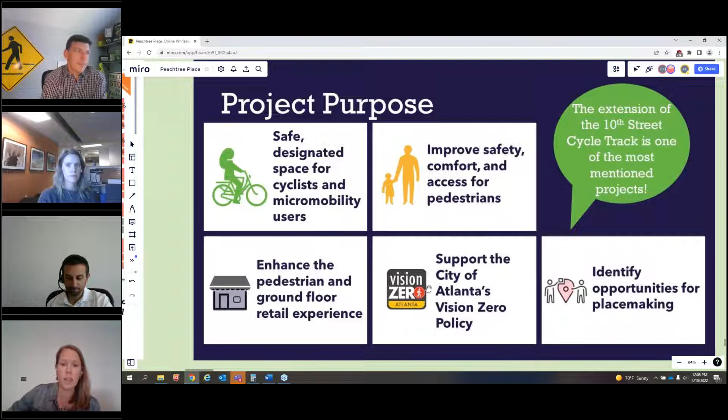Enhance the pedestrian and ground floor retail experience. Identify placemaking opportunities along the corridor. There are some great opportunities that exist today and in the future, and we want to make sure we leverage those to create a really robust experience. And finally, support the city's Vision Zero policy, which is a great way to look at zero crashes in our city and a path forward.

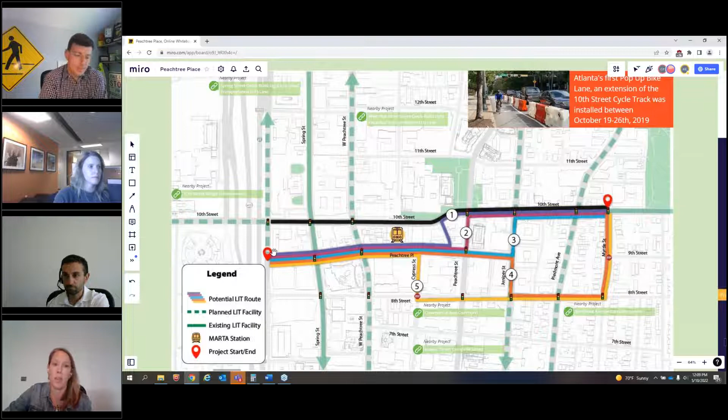This project is one of many Midtown Alliance is working on. We have the Piedmont Avenue Complete Street Project, the Juniper Street Complete Street Project, and Commercial Row, happening at Peachtree Place between Crescent and Peachtree Street. To the west, we have West Peachtree and Spring Street Quick Build, and the 10th Street Bridge Enhancement Project, which will pick up right where William and Peachtree Place meet. Again, this takes us from the Myrtle 10th Street cycle track all the way over to William and Peachtree Place.

Where we are in this process: we started off last year reaching out to some key stakeholders along the corridor. We also did a walking audit with the team to identify opportunities and brainstorm potential solutions. From that walking audit, we moved forward with a multimodal analysis report, more of which you can find on the website. That gave us direction on what was really feasible within the corridor, and we'll be walking through that momentarily. Since that time, we've started laying out what the conceptual design could be, and this is still moving forward to refinement. So here we are today.

We are in round 2 of stakeholder interviews and the virtual open house. Moving forward from this process, we'll refine the conceptual design and move into schematic design, and then to the approved concept presentation. Funding and implementation has not yet been approved. It's part of the TSPLOST 2.0, so get out and vote later this month. That will be on the ballot for TSPLOST.

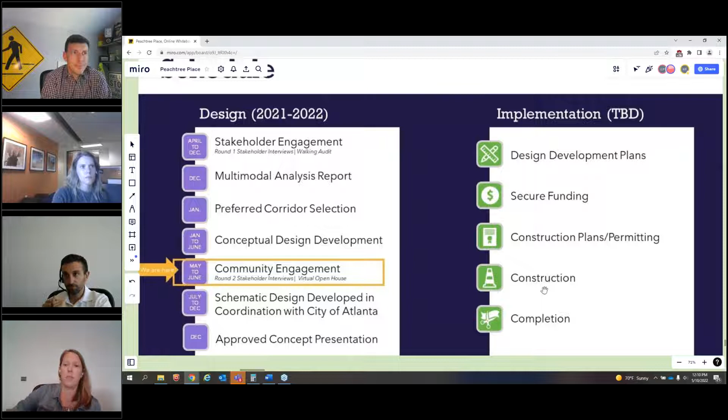And with that, I'm going to turn it over to Jeff, who is going to walk through the numerous alternatives that we reviewed as part of our multimodal analysis. Jeff, I'll turn it over to you. Thanks, Addie.

Yeah, so as Addie said, we had a lot of alternatives and a lot of scenarios that we walked through as part of laying out these bike lanes. This outlines our screening process. There was a slide earlier with 5 potential routes that go through a lot of intersections and have a lot of different ways that a bike lane could move through those spaces.

So we have this process where we started out with that list of feasible routes. We screened them and assessed them for measures of safety, connectivity, comfort, and directness. We took some of the routes that came out of that screening and put together sketch plans to inform additional analysis, where we looked at things like reassessing safety and evaluating traffic movements and multimodal wait times. From that point, we moved into our recommendations. But I'm going to step through each of these steps to give a better overview.

As the alternative screening began, we took a look at industry guidelines that pointed us to some top measures for effective networks: safety, comfort, and connectivity. Along with directness, we used these measures to screen those routes. For the safety measure, important to Midtown and to the Vision Zero goals of the city, we decided to take a look at the number and severity of conflicts between vehicles and bikes that could potentially happen along those routes. That was important, especially when we looked into the crash histories and saw that 46% of bike crashes around this area resulted in some sort of injury for the cyclist.

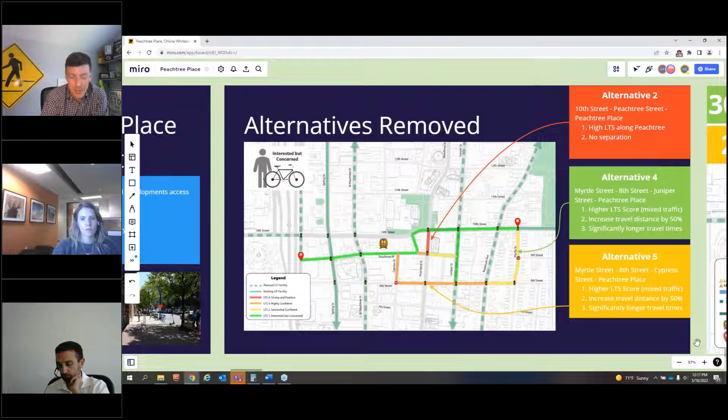So, well, we can go to the next slide.

The routes that did emerge out of that, which we call alternative 1 and 3, were carried into the sketch plan phase. These routes both use 10th Street and Peachtree Place, the difference being whether they transition at Crescent Avenue, as in alternative 1, or Juniper Street, as in alternative 3.

The main question between these two routes at this point was how the bicycle lane was going to be positioned along 10th Street, the various lane configurations and patterns that could accommodate travel at the intersections and at those transition points, and several methods of signalized crossings, especially along 10th Street.

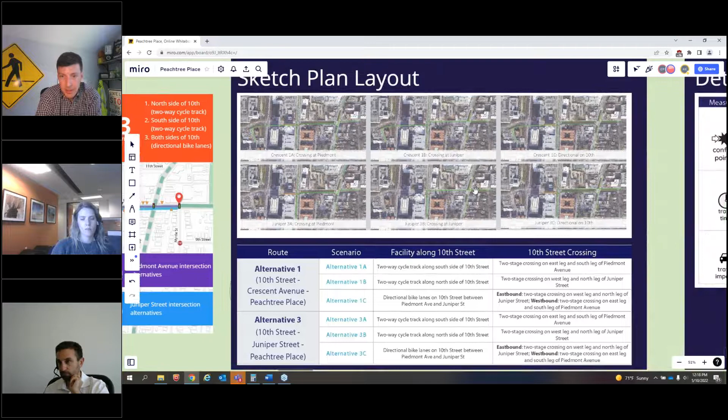This screening produced 6 main scenarios for detailed evaluation. The main differences between these 6 is which side of 10th Street is going to be utilized, and how that transition would work, especially at the Juniper and Piedmont intersections.

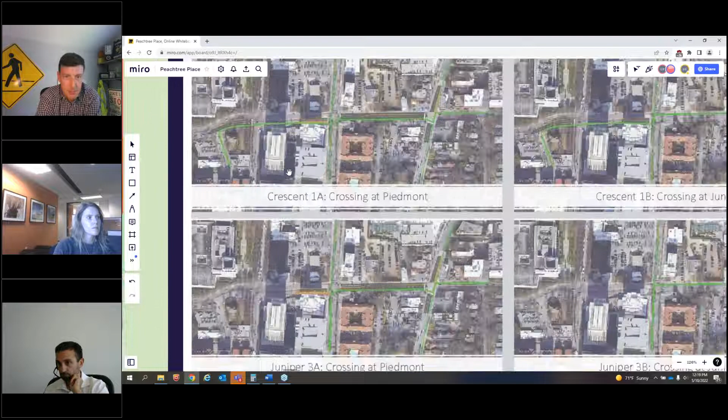On the left-hand side, we've got alternative 1A and 3A. Alternative 1 being the route that uses Crescent, and alternative 3 being the route that uses Juniper. Both of these would cross at the Piedmont intersection first onto the south side of 10th Street and then continue west.

1B and 3B would continue the cycle track as a 2-way facility along the north side of 10th and then cross it at Juniper.

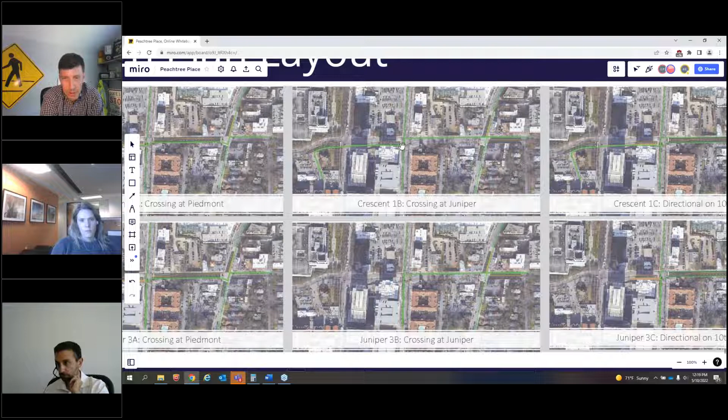And we had a third option of 1C and 3C, which had a bicycle lane on both sides of 10th Street, the north side and the south side, and offered crossing opportunities at both the Juniper and Piedmont intersections.

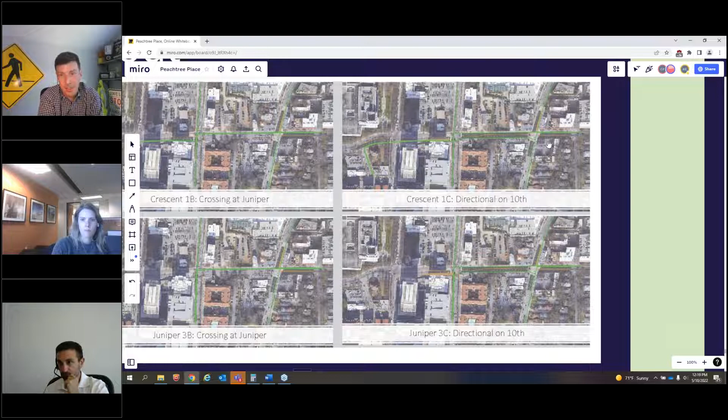And here's where we moved into the detailed analysis. Each of the scenarios was reassessed for the type and severity of conflict point, and assessed for pedestrian and cyclist wait times at intersections and changes to vehicle operations.

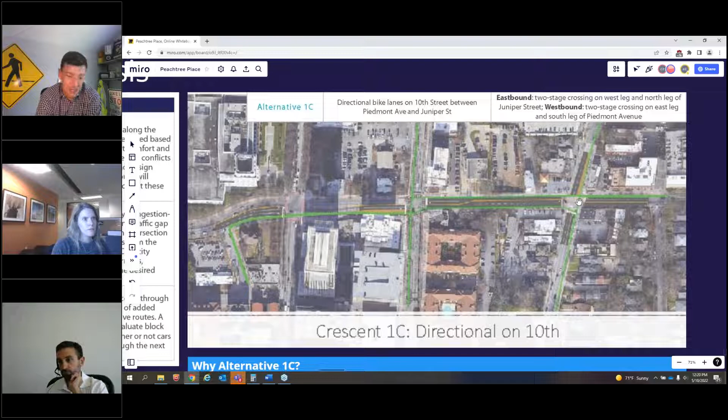The scenario that did result in being recommended as the best between those six was Alternative 1C. It includes directional lanes on 10th Street, had the lowest severity of driveway conflicts, and with those lanes being directional on either side of 10th Street, relied a lot less on drivers looking for cyclists approaching from their right-hand side.

It also provided the ability to add some safety through a bike-only crossing at the Piedmont intersection, which is a slight variation between this iteration and what you'll see in the concept plans. It was also shown to keep vehicle stacking within the current distances between Juniper and Piedmont better than some of the other alternatives. Utilizing Crescent as 1C, as opposed to 3C, did help us avoid some private property conflicts that the Juniper route couldn't avoid.

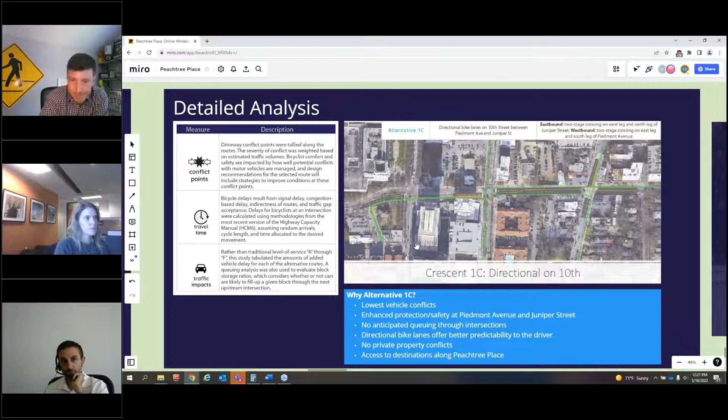I think I can certainly go into questions as far as more of the analysis, but I'm going to turn it over to Chris now to go over the concept.

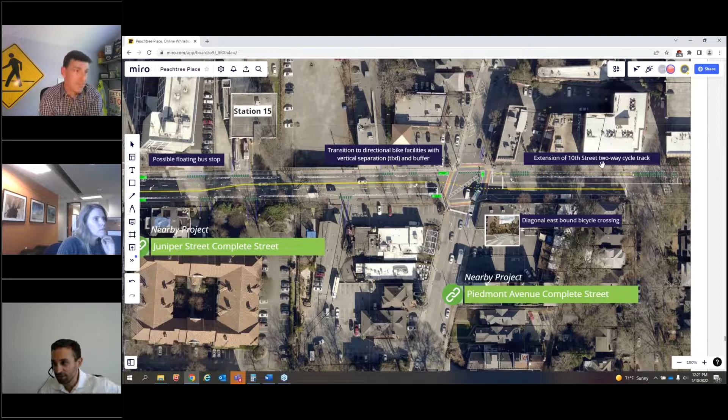So I'm going to walk through the concept starting at 10th and Myrtle, where the existing two-way cycle track ends. We plan to continue the two-way cycle track to Piedmont Avenue.

Just want to point out that we're currently just showing a generic buffer treatment as white striping. However, we have yet to select a buffer type and material because that will be defined as we complete the concept, based on funding and geometric constraints. So that's what that is when you see that.

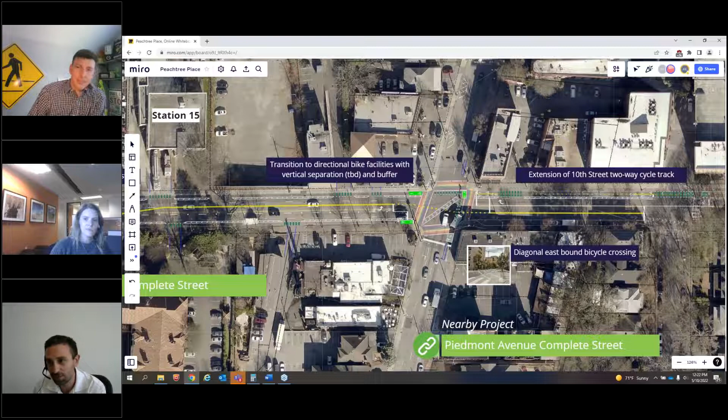As we migrate over to Piedmont Avenue, this is where we intersect the Piedmont Avenue planned bicycle lane and complete street project.

One of the things that we did here was we transitioned from a two-way cycle track on the east side to directional bike lanes on the west side. And we use a diagonal crossing to get the eastbound cyclists over, so there will be a dedicated bicycle scramble phase that will permit that diagonal crossing.

We also wanted to create an intuitive connection from Piedmont Avenue bicycle lanes to the 10th Street bicycle lanes as well, and we do that by tying into the existing intersection crossings there with the bike lane.

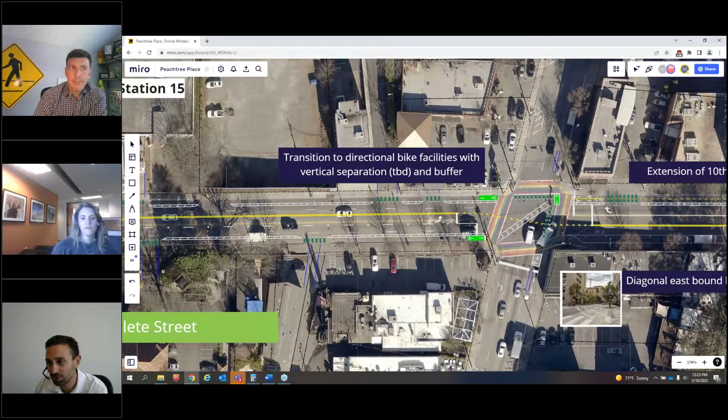As we progress over, we have directional bike lanes on the block between Piedmont and Juniper Street. You'll notice there are alternating left turn bays for the eastbound left at Piedmont and the westbound left at Juniper.

That was a result of the traffic study and also some lessons learned from the demonstration project. So we wanted to provide turn storage at both of those intersections to help alleviate some of the queuing that was a result from that project.

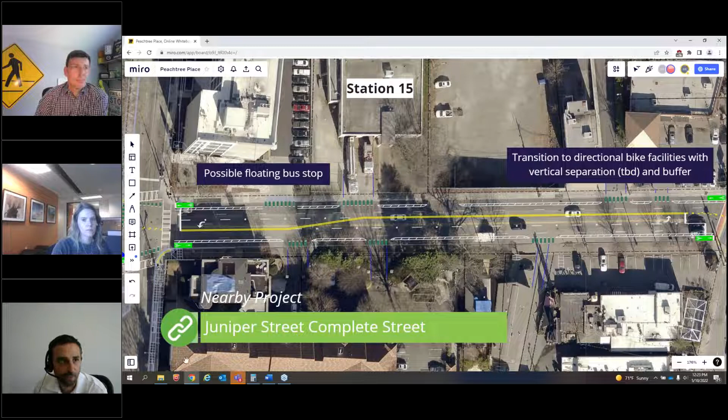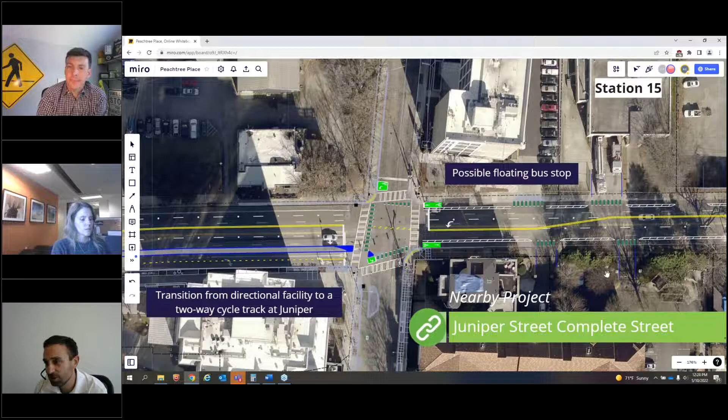We also need to accommodate the fire trucks leaving the fire station, so we will be looking at the turning movements of fire trucks coming in and out and making sure that the facility doesn't impact emergency operations.

We'll also be looking into a floating bus stop near the residential building at the corner of 10th and Juniper to accommodate their accessibility needs as well.

As we tie into the Juniper Street intersection, there will be the Juniper Streetscape project, which will include a southbound bike lane on the west side.

That project also has some new signal phasing, so there will be protected bicycle crossings going southbound as well as going eastbound. There'll be a protected right turn signal phase and a southbound right turn signal phase that will help time separate the bicycle movements with those turning movements.

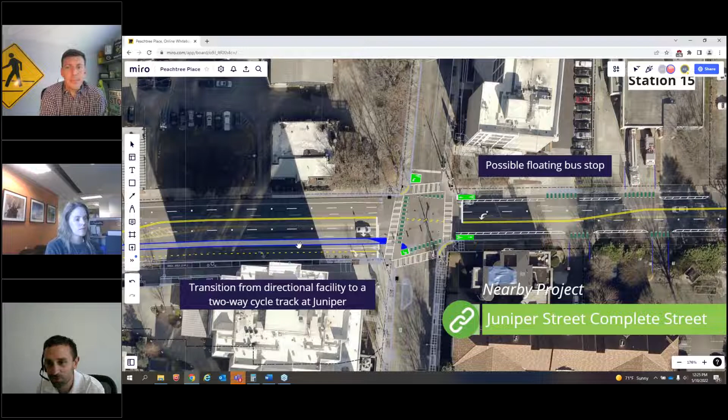We also transitioned back to a two-way cycle track, this time on the south side, as we position the bicycle lanes to get access to Peachtree Place. There is a nice, robust buffer between the two-way cycle track and this section of 10th Street, which carries a little bit heavier volume than to the east.

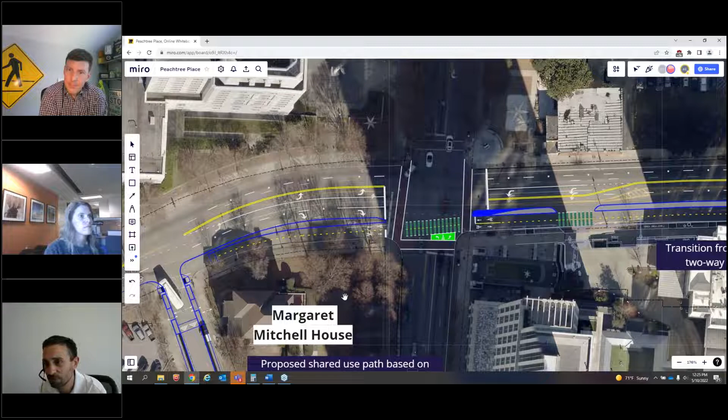As we progress over to the Peachtree Street intersection, we are proposing new signal phasing here as well. There will be time-separated eastbound right and westbound left movements with the bicycle movements, so there will be some safety added there.

There is also a turn box provided just to the south of the crossing that will allow cyclists to continue north on Peachtree Street, or if they would like to continue west onto 10th Street and go directly down 10th Street, that box is provided there as well.

As we continue west, we now ramp up onto the sidewalk as we prepare to turn south on Crescent. What's shown here is a proposed condition as part of the Stratus development.

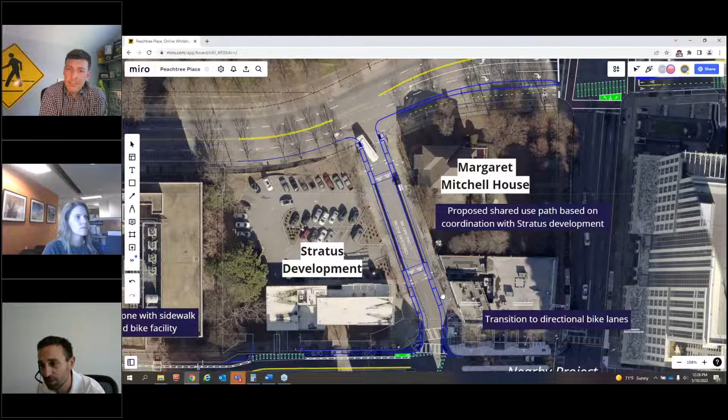There will be one-way southbound on Crescent Street with also this very wide and long raised table crossing mid-block that will create a pedestrian space, and then we will have a shared use path along the eastern side of Crescent Street to go down.

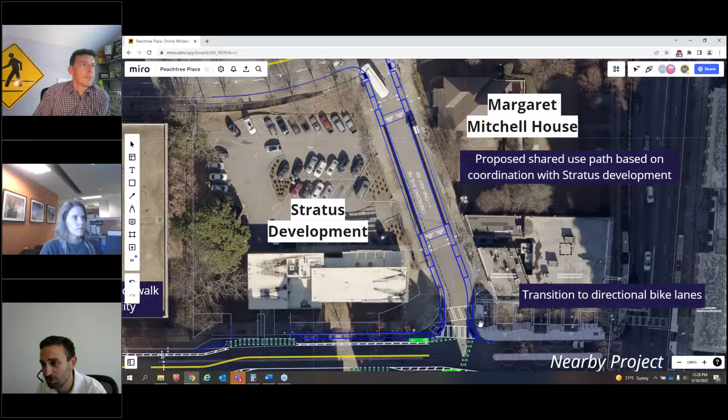There'll be a 12 to 14 foot wide shared use path/sidewalk to get cyclists down to Peachtree Place, where they will then enter directional bike lanes on either side of Peachtree Place at the intersection with Crescent.

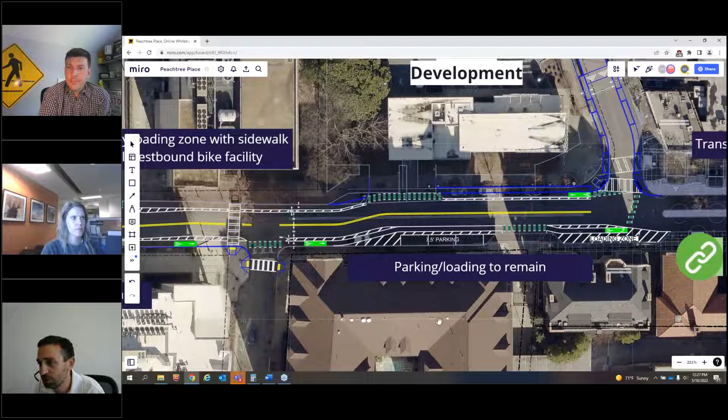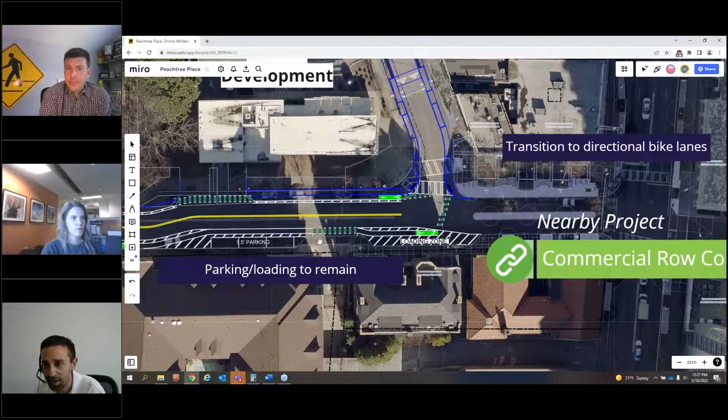This design minimizes impacts to the newly constructed commercial row project. There's also a newly upgraded driveway apron just to the west there that provides ADA compliance for the sidewalk going across that apron, which will be preserved in this design.

And that apron actually does lead us to this design choice of having the parking on the inside of the bike lane, just so that we can provide that, keep that ADA compliance across that driveway.

We've also introduced a chicane as we continue west to help calm traffic. Currently, Peachtree Place is a very long and straight street with nothing to really slow vehicles down, so we wanted to introduce some curves here in order to calm traffic.

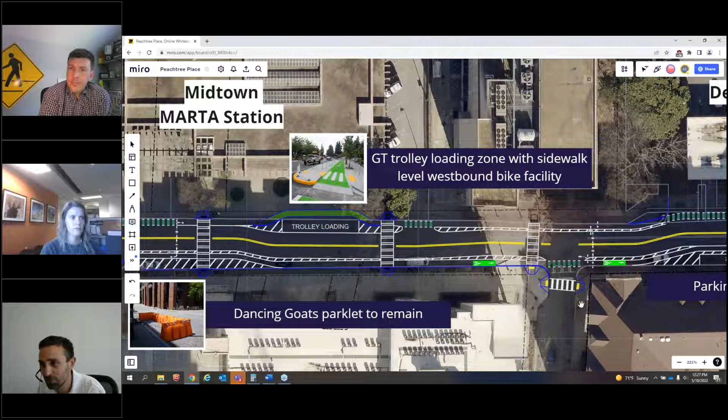As we continue west, we now enter near the Midtown MARTA station. As you can see, we've added 3 new crosswalks as part of this project, one at Cypress Street, and then 2 at the MARTA station on either end of the facility to accommodate existing pedestrian crossings that occur today.

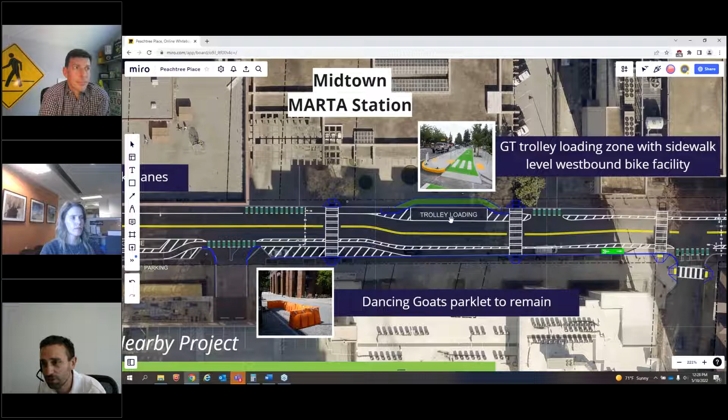There's also space for the Georgia Tech trolley that can pull off to the side and dwell there, and we ramp the bicycle lane around it up onto the sidewalk. There's an example above showing what a floating bus stop may look like.

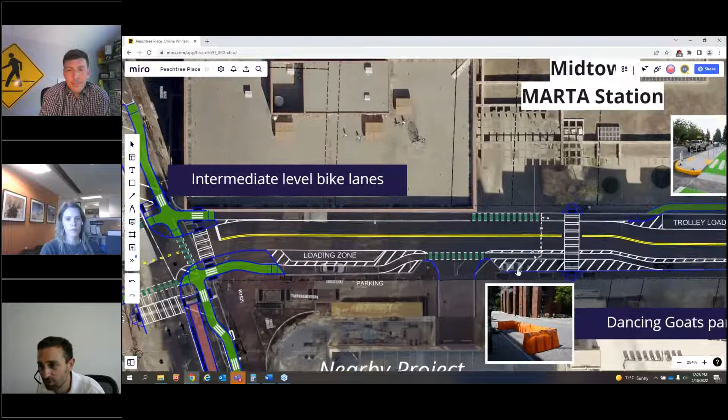We've introduced another chicane on the other side of the Marta station, again to calm traffic. We've preserved space for the parklet that's currently being used by Dancing Goats, so that space will be preserved.

We've also maintained some loading zone for future retail needs. That could be a parklet, it could be valet, it could be parking, loading, but that is there for future retail needs as well.

As we continue to the intersection with West Peachtree Street, we've paid a lot of attention to this intersection. It's currently skewed, so we wanted to better align the eastbound and westbound approaches. This will help direct traffic to where they need to be and also make pedestrians and cyclists a little bit more visible as vehicles now need to make 90-degree turns at this intersection.

We've also expanded, or are proposing to expand, some of the sidewalk space, especially on the tight corners on the northeast and northwest side, and create some expanded bump-outs where there is unused space as part of the overlapping design of this project and the West Peachtree Street Complete Street project.

The green shaded area you see are actually intermediate level bike lanes. This was done for a number of reasons. One, it was to clearly delineate where cyclists ought to be.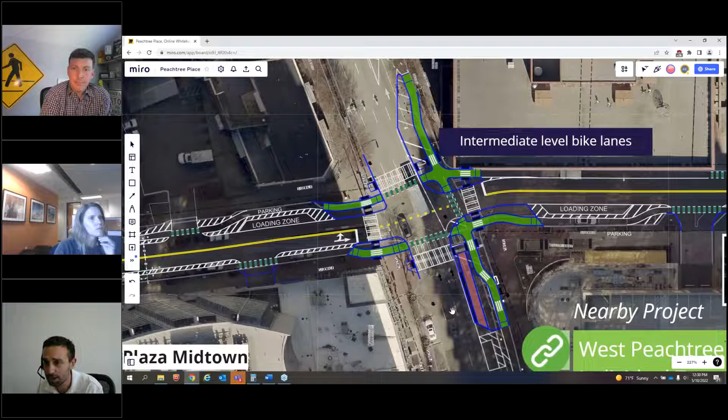It also helps because it has a detectable edge so that blind pedestrians know that there is a difference in use as they start to walk between the sidewalk and the intermediate level bike lanes, and it will guide them to appropriate crossing locations.

It also requires less right-of-way to construct ramps, loading zones, and landing areas with this treatment, as there are incremental declines in elevation as you go across the bike lane and then down to the street. So it does require a little less right-of-way than if we were to have fully depressed bicycle lanes through here.

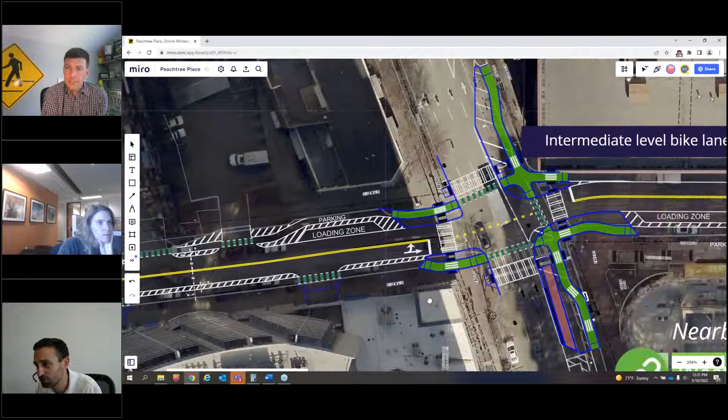We've also, if you scroll back, provided a floating bus stop for the current commuter bus just south of the intersection. That's delineated in that red color, so there'll be room for any sort of bus stop amenities or space for buses to pull off if they need to.

As we continue west, we maintain 2 loading zones on this block, one on the west side and one on the east side. The one on the east side is mainly for retail deliveries. That was stressed as important to their business function, so that was maintained.

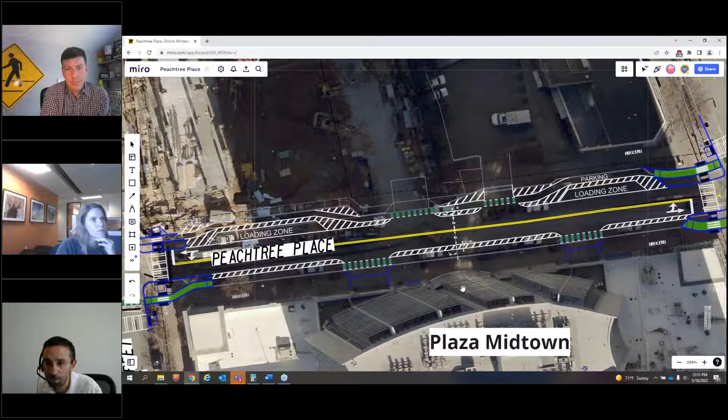And then the one on the west side is for rideshare for the student tower that is on that side of the building. Those are outside the bicycle lane with a nice buffer zone for doors opening as well.

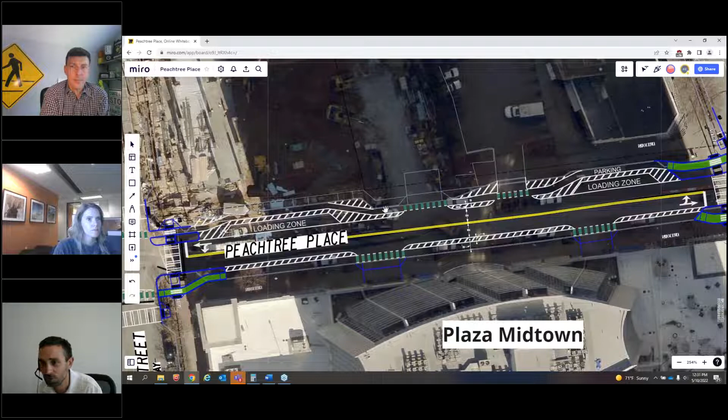This design does require the removal of parking and some of the bump-outs along the south side of the street. However, there is free parking in the plaza garage to accommodate those needs.

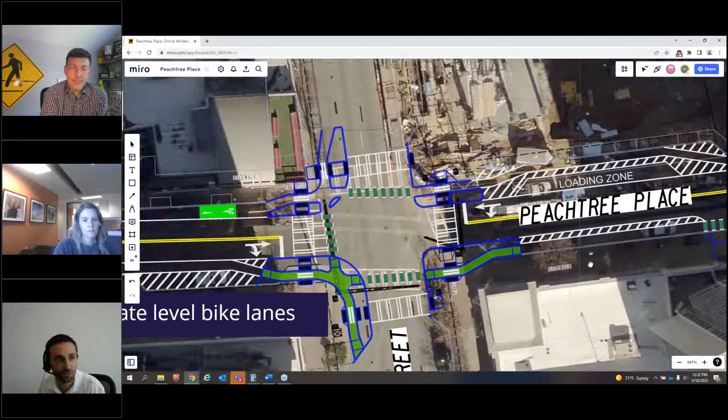As we continue across the intersection with Spring Street, there is a future signal planned for this intersection, which will help make this crossing safer. This intersection also has a protected intersection design. We're using intermediate level bike lanes on the south side only, where we've had some right-of-way constraints, and then fully depressed bicycle lanes on the north side where we weren't as constrained.

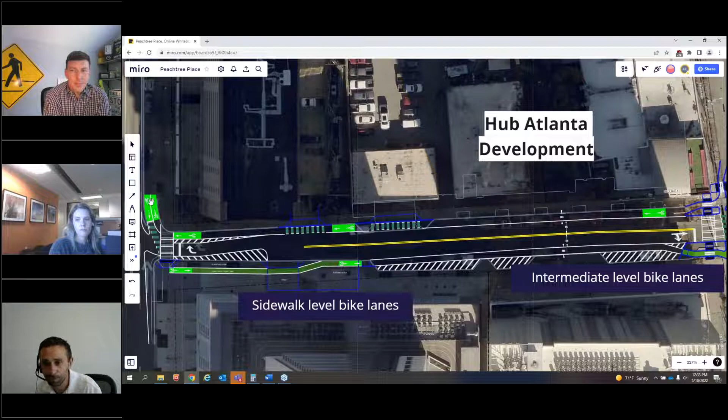As we continue west, this block of Peachtree Place is planned to be converted to two-way as part of another project, so that is shown here. It is just two-way up until the Modera garage entrance in the back, and then it's still one-way outbound onto Williams Street. We connect to the 10th Street Bridge project here at Williams Street.

The eastbound bike lane actually ramps up onto the sidewalk level and then comes back down. This was a way to avoid a lot of utilities, including fire hydrants and water vaults along the south side of this block. We've also provided space, as shown in the hashed out areas to the east, for future parklets or bicycle parking corrals, or things of that nature, so that could be dedicated space for the community.

And I think that's it for the walkthrough of this concept.

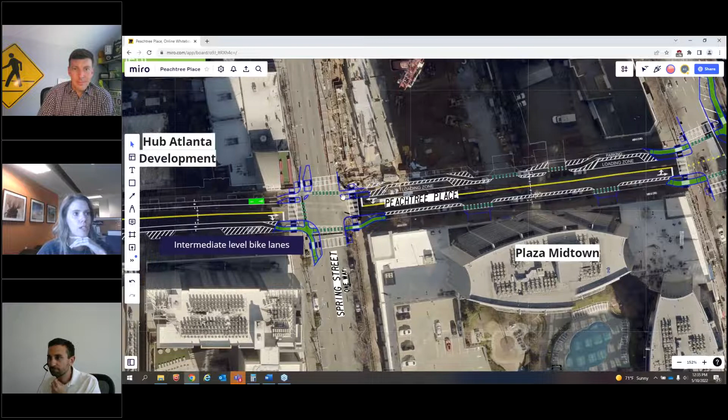It's called the Last Mile Project. So if you go to midtownatl.com/projects, it lists all of those things we're working on. You can stay up to date on the process there, but it's definitely one that we know is really, really needed and desired. I walk across that intersection daily, and we know it's not fun. So hopefully soon.

Let's see. We have had some questions about the barrier protection, both material and the need to stop cars from parking in the bike lane like they do. So wherever we can along this corridor, we're going to provide the highest level of protection that we can. What that exactly looks like at this point, it's too early to say. So yeah, I mean, we're going to do what we can.

The other piece that we have really tried to bake into this plan is understanding that there's a lot of competing needs for the curb. And so trying to accommodate the need for temporary loading wherever possible for residences and businesses along this corridor, we think will offset some of that behavior.

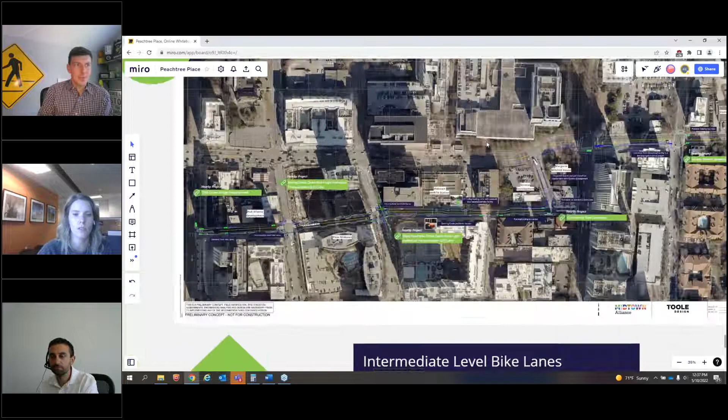We've got a question, Chris or Jeff, about bike signals at the intersections along the route. We've had one about where those signals will exist, and another about how to reduce right turn conflicts, so where there will be permissive right turns versus no turns on red.

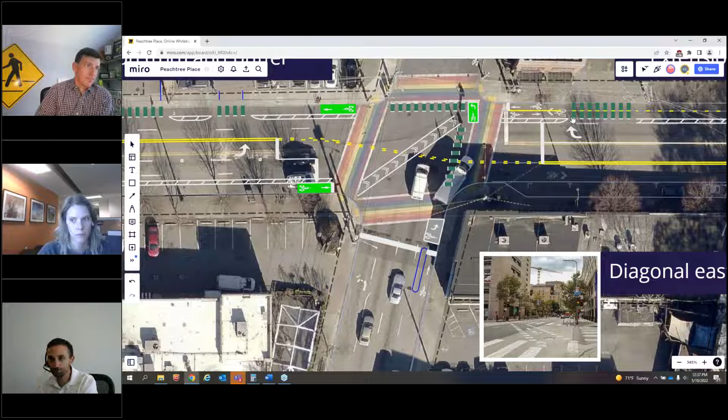Yeah, so we're proposing, I'll start at Piedmont, going in the order that I walked through the concept. At Piedmont, there will be a bicycle signal for a diagonal crossing. However, the northbound cyclists and westbound cyclists will run concurrently with vehicles. However, there will be some no turns on red to help mitigate the conflicts with right turning vehicles and cyclists staging to turn. The turning volumes here were low enough that recommended thresholds weren't really met for complete phase separation of those movements.

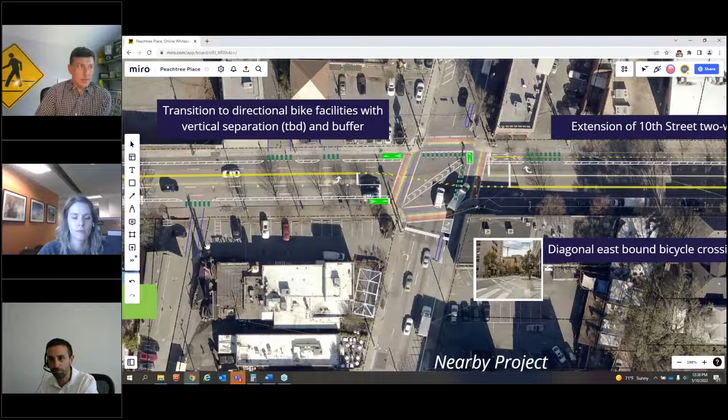Going over to Juniper, there were significantly more turning conflicts, and so the proposal there is to have time-separated bicycle movements and conflicting right and left turn movements. Part of that is part of the Juniper Street project, and then part of that will be part of our project.

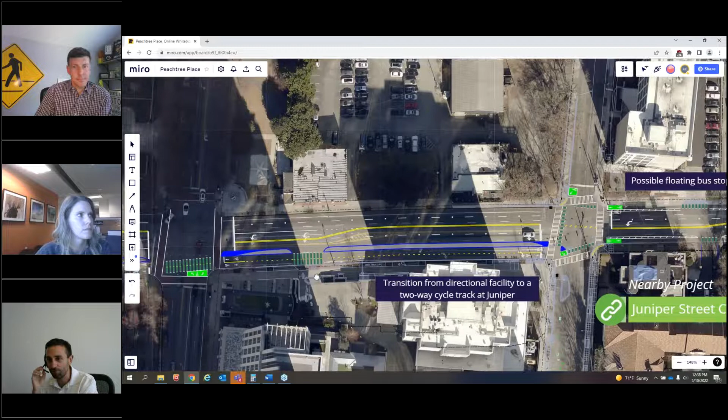So those movements will be protected. And then at Peachtree Street, we plan on having a dedicated bicycle phase that will be separate from the conflicting eastbound right and westbound left turn phases.

And then at Spring Street and West Peachtree Street, we're not proposing signal modifications there. We went with a protected intersection design. The volumes here are significantly lower than along 10th Street, so we're doing a lighter touch in terms of traffic signals and instead just opting for a more visible approach as cyclists and pedestrians cross this intersection, making them a little bit safer with design.

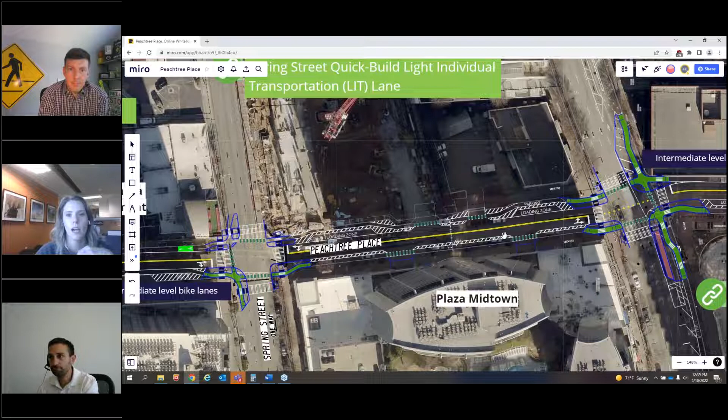Thanks, Chris. While I've got you unmuted, we have a question about the look of the map, just to clarify what the blue lines along here mean versus the green. Could we do a rundown of that?

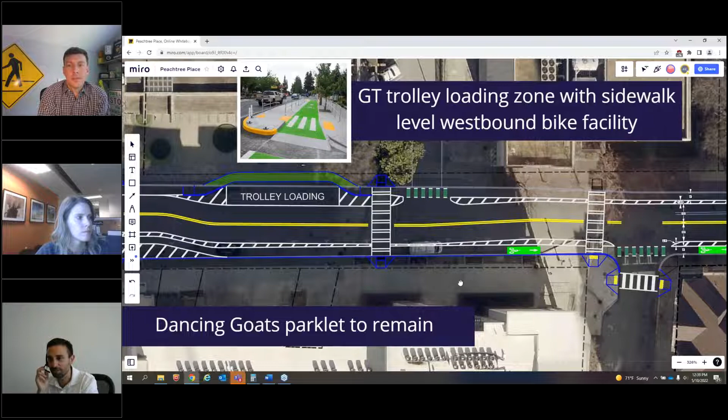Yeah, so the blue lines are just the curb lines. Some of it is new, some of it is existing. It's just a way to show what the final curb alignment will look like. Most of it, like I said, is the existing curb. The green are pavement markings, as are the white lines.

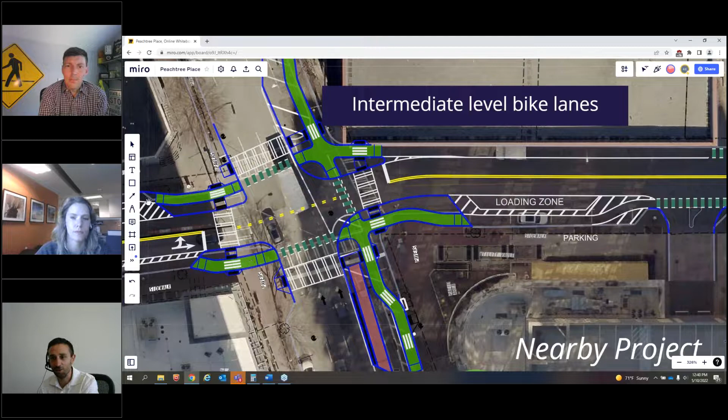The greens shown here are conflict markings across driveways and intersections. The green in the lane is more for bicycle pavement markings, to make them a little more visible. And then the ones at the intermediate level bike lane, that was just a way to show on the plans where those will be. They may not necessarily be painted green during construction, it was just a way to communicate where those are. And the same with the red to the south, that's just to communicate that that's going to be a transit area, and what that looks like hasn't been designed yet.

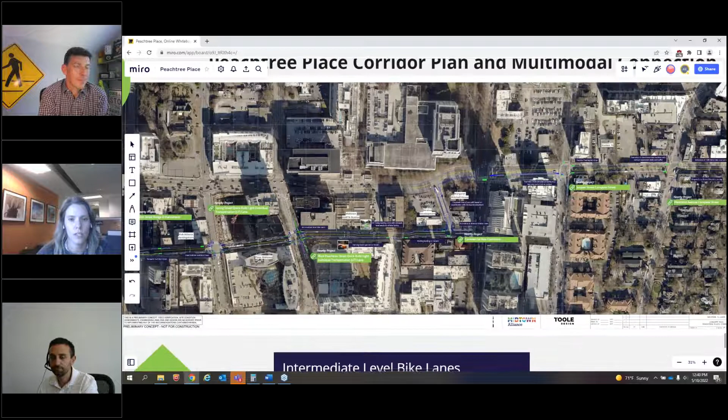Awesome, thank you. So we've gotten several questions about protection along the route. Just again, want to reiterate that we're early in the design phase, so we haven't selected the exact materials that we're going to use. There won't be a single material used throughout the corridor, so it'll be case specific likely.

And as we make those decisions, we will have other meetings that present those more detailed decisions. Along Peachtree Place specifically, this is a constrained area, a lot of residential and commercial needs. It has the advantage of being a fairly low volume street. So where we can, we've created pickup and drop off zones.

But we are in a constrained space. So again, where we can provide protection, we will. And in some cases, we might be limited in what we can do. So we just have to advance the plan and see exactly what we're able to squeeze in and what makes sense.

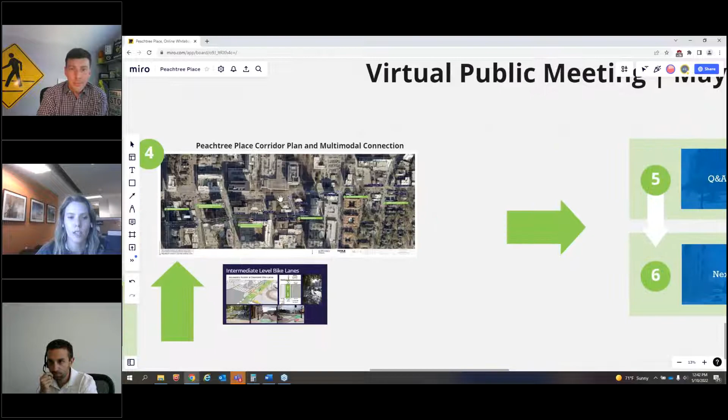We've gotten a couple of questions as well about the Stratus project, which is 80 Peachtree Place. It's a large project that abuts Peachtree Place, 10th Street, and Crescent. The proposed main entrance for this development's parking deck is on 10th Street. There will be a loading dock on Peachtree Place.

So while we do anticipate a slight change in traffic volumes, not so much that it's going to be catastrophic to the area, according to the projections that we've seen. This is still a proposed development, so there's nothing guaranteed at this point.

We're coordinating with those developers in terms of how the proposed streetscape along Crescent progresses, and the courtyard they have proposed for the Margaret Mitchell House. All those details are being taken into consideration, but from our team's perspective, understanding that we live in a city that is developing, that there's a lot of density coming, it just highlights the need to provide these dedicated and more protected spaces for people so that they can travel safely throughout the district and really enjoy the streets and all they have to offer.

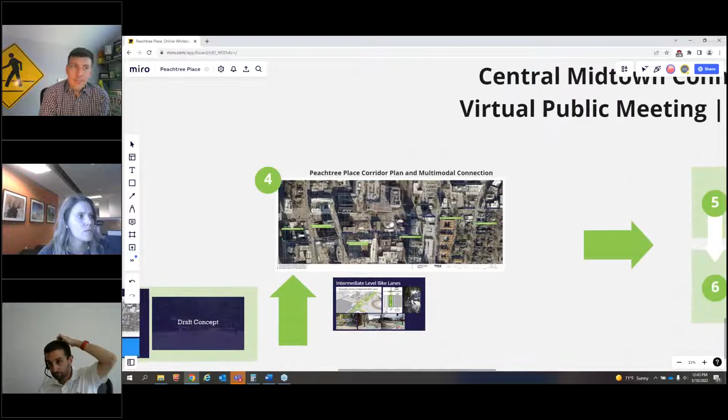So we have a question about the alternatives on 10th Street, and people who prefer to remain on 10th instead of taking the detour on Peachtree Place.

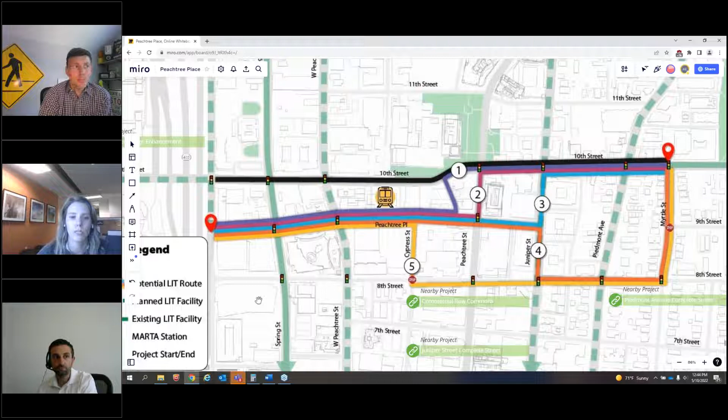Certainly, just as today, if you are a fearless and confident rider and want to proceed on 10th Street, that's going to be an option for you moving forward. We don't anticipate any changes to 10th Street as a result of this project, but routing along Peachtree Place gave us the opportunity to route people towards more destinations, retail, residential, MARTA, and really presented a lot of opportunities for placemaking, taking advantage of those lower vehicular volumes. In the grand scheme of things, what you get out of this route in terms of access to different amenities, the trade-off is a really small travel time delay. So it made sense.

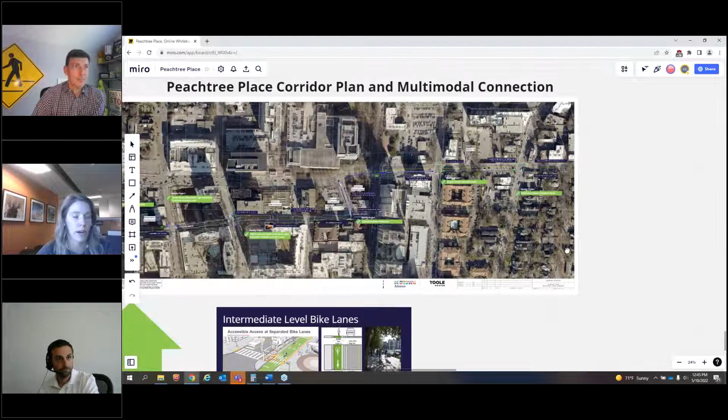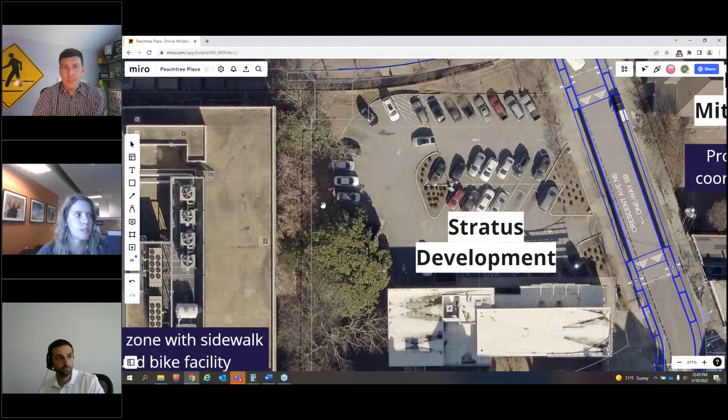Where will the driveway for Stratus be located? This is again a separate private development, not associated with this project, but they will have two curb cuts, one on 10th Street, which is a variance that they sought so the curb cut would be moved off of Crescent, which we think was an advantage, and one on Peachtree Place. They're still going through the design process, so the final plans remain to be seen.

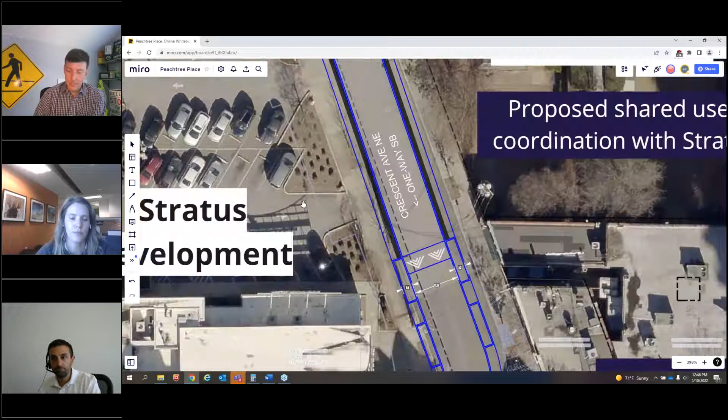I don't know how much we got into this, but as part of the Stratus development, Crescent will be turned into a one-way southbound street. It will be heavily oriented towards pedestrians, with a shared-use path potentially for bikes and pedestrians to travel safely down that stretch of path.

So we had a question about people turning right on Crescent onto Peachtree Place to access Williams Street and 75. Maybe, but that doesn't seem like the most direct or preferable route. So yes, people can use the streets to get to different places, but I don't think that would be the preferred way to get on 75 and 85.

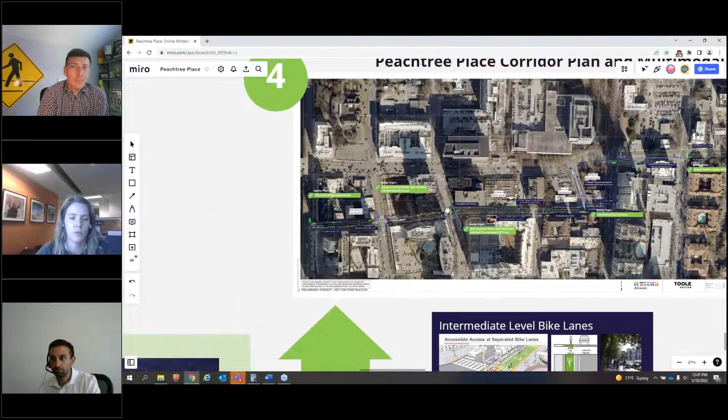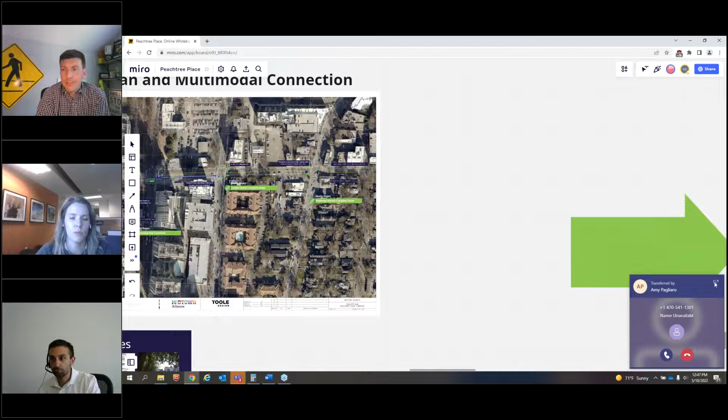Chris or Jeff, can you speak to the bike delay that this routing suggested in our analysis? Yes, I can speak to that. The travel time we looked at for route alternative 1 was going to be around 7 minutes from start to end.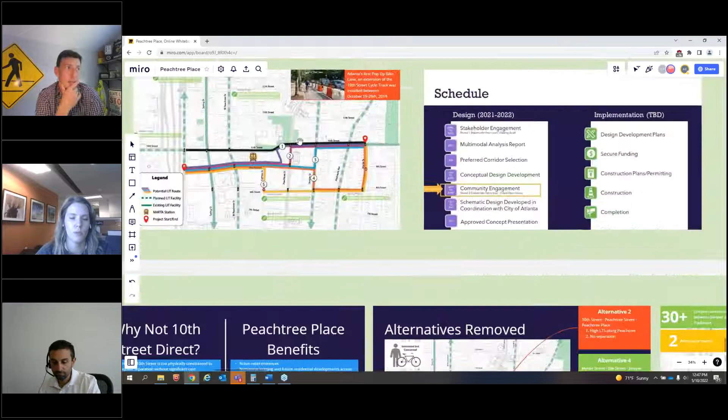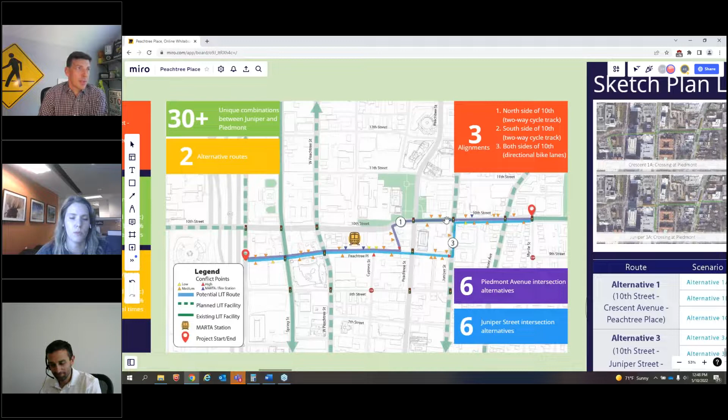That was a difference between the Myrtle and 8th route, which are going to be more like 9 or 9.5 minutes. When we took a look into the detailed analysis at the intersections of Juniper, Peachtree, and Piedmont especially, where we've got those dedicated bike phases and movements, we saw about a minute to a minute and a half of wait time across the total of 10th Street on average. That will depend on when the cyclist arrives. It could be less.

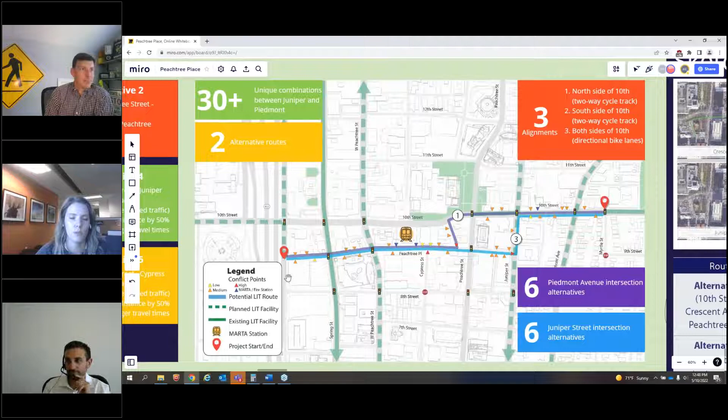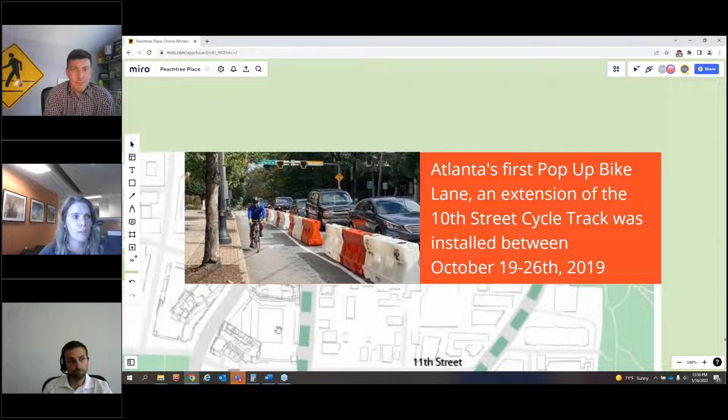So we have a question about what was learned from the pop-up bike lane on 10th Street that we did, I believe it was 2018 or 2019. That was a really fun project. For those of you who remember, we did one of the city's first tactical urbanism projects and popped up a bike lane from the end of the cycle track to Peachtree Street. We learned a lot from that project, but one of the key things we learned was that a bike lane along 10th Street in this section was demonstrably feasible, and that the biggest thing we needed to focus on was signal optimization, which could really offset the additional travel time incurred by people driving cars. So it was very valuable lessons learned from that project that will be utilized in the implementation of this one.

Another question about bike detection at these intersections, and I think that's separate from the signalization at the intersection. So Jeff or Chris, can you speak to bike detection?

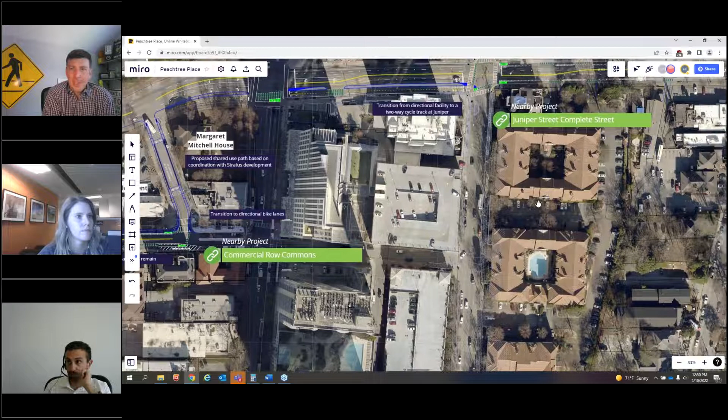Yeah, so that will be selected in coordination with ATL DOT to make sure we're using products they're currently using elsewhere in the city and that they're happy with. It will most likely be passive detection in the form of video or something similar, so that cyclists aren't required to push a button to activate it.

Have a question about timeline. So timelines are always kind of hard to nail down. We're hoping to get to 30% design on this project in the next several weeks to a month or two, so we'll be coming back to the public when that's finished, and then we'll move on to 60-90% plans, which will probably be 6 months to a year. This project is on the TSPLOST list, so once we have funding identified, we'll be able to move forward with more concrete timing. So if you have the opportunity to get out and vote on TSPLOST, please do.

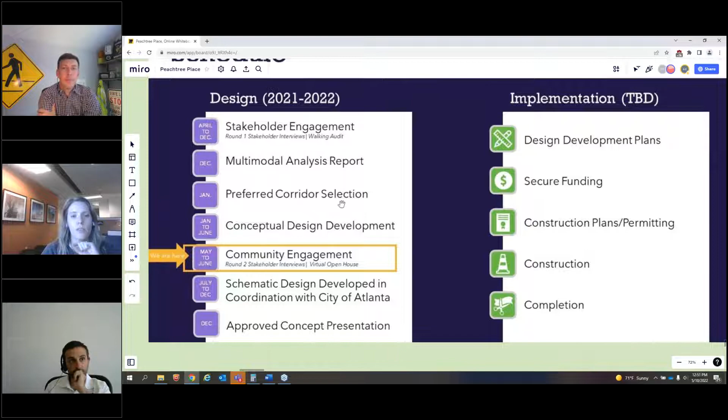We've had several questions about the details of the traffic analysis. There is both the full traffic analysis and an executive summary, a high-level digestible option, that you can find at midtownatl.com/projects/central-midtown-connection-plan. That's really where you can access all the information associated with this project. At the end of this presentation, you'll get a link to the recorded version, and the Q&A will be posted there as well, along with the multimodal traffic study. There will also be a map exercise where you can review and comment on specific things throughout the corridor, and future design iterations will be posted there too. So keep an eye on that page, it's really a wealth of information.

We've had several more questions about protection along Peachtree Place. Again, to reiterate, we're going to provide protection where we can. The details of that protection haven't been decided yet at this point, but where we can fit it, we will.

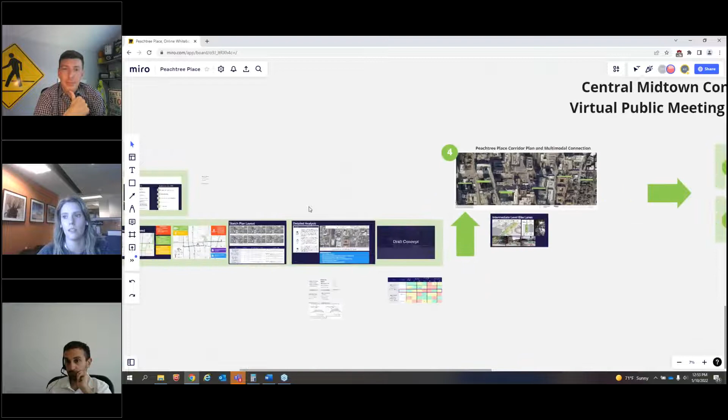There was a question about the long-term vision for Peachtree Place. A few years ago, it was planned as a very slow, pedestrian-focused street. Has this plan changed? No. In fact, this project really seeks to enhance the pedestrian experience along this corridor. One of the reasons Peachtree Place bubbled up as the preferred route was because of its opportunities for placemaking. It's a lower car traffic volume street, so it's a great place to walk, really beautiful, and it links to Commercial Row Commons, which will be a great plaza enhancement at the corner of Peachtree Place and Peachtree. So yeah, everything we're doing seeks to enhance the pedestrian experience along Peachtree Place. I think a lot of times our conversations get into the specifics of the bike lane route and protection, but at the heart of our projects, the pedestrian experience is one of our top priorities.

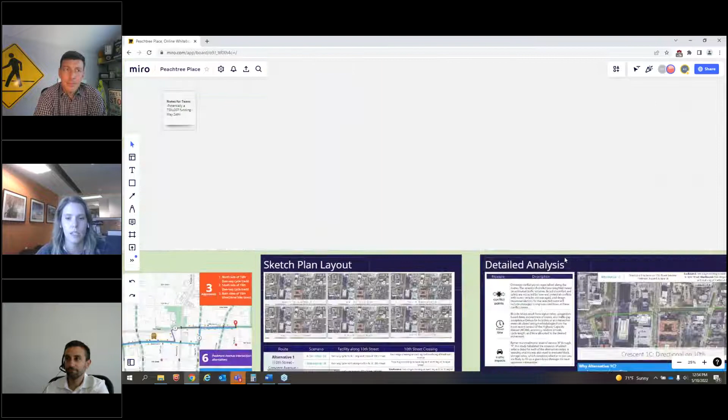There was a question about the crosswalks on Peachtree Place outside of the MARTA station and whether those will be raised. We're still in the early phases of this project, so exactly what those crosswalks will be is still up for consideration. We work in coordination with MARTA and the tech trolley, and we seek to create a design that will work for everybody. We'll see how those conversations progress and move forward with the best possible level of protection while still being functional.

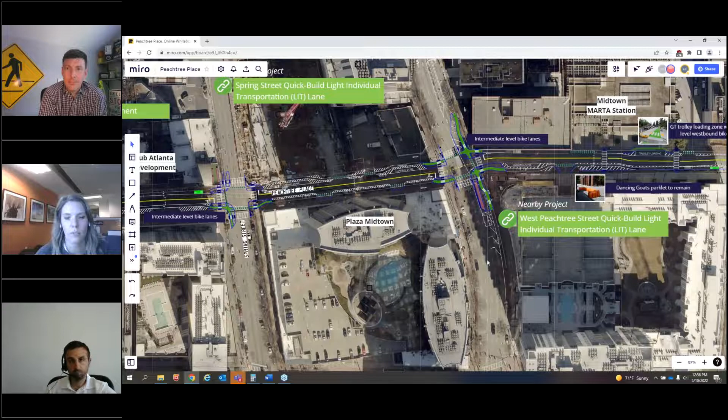There's a question about an update on the West Peachtree bike lane. This is kind of beyond the scope of this project; we're working to assist the city with implementing that project. If you want to stay up to date on its progress, we do have a project page for it, but that's a City of Atlanta project, so we're acting as an assistance arm for them in whatever way we can. Apologies, I can't give more detailed information than that, but there's a lot of moving parts.

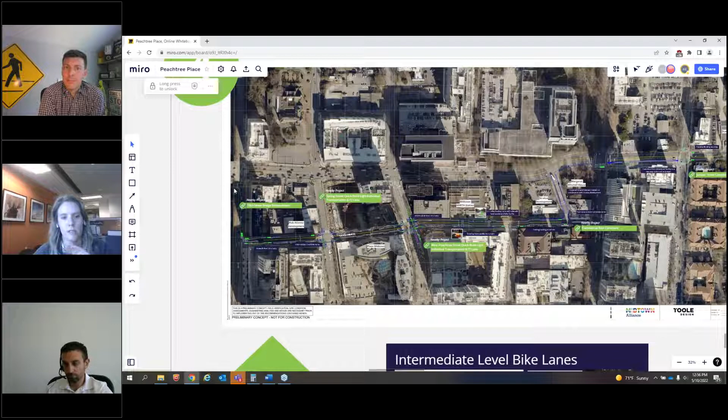When will the 10th Street Bridge be fixed? That project is in its final steps of design. It will provide protection along Williams Street and on the 10th Street Bridge - again, a separate project. It does have a project page you're welcome to visit at Midtown ATL/projects. That will be coming on in the next few years, so we're really excited about that one.